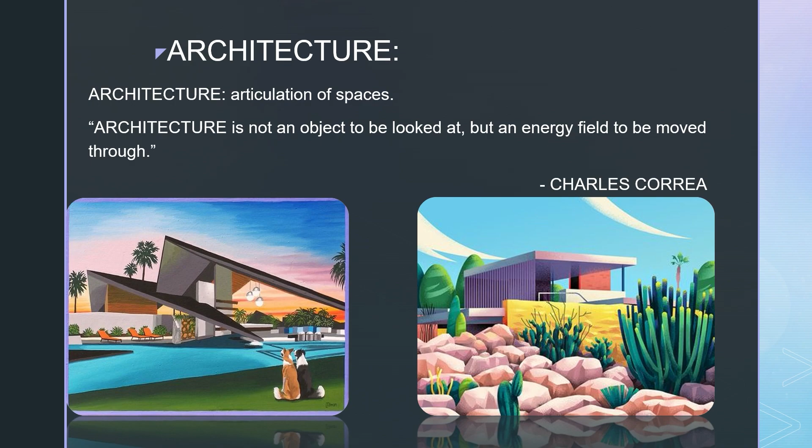From this, we understand that architecture is the built realization of a particular concept or idea. This idea can be about construction or the way people will use a building, or how the building fits into the physical or social environment or landscape.

When talking about architecture in terms of the great architect I.M. Pei, he says, life is architecture and architecture is the mirror of life. Another famous architect, Renzo Piano, says, one of the great beauties of architecture is that each time it is like life starting all over again.

And the legendary architect Zaha Hadid mentioned, I don't think that architecture is only about shelter. It should be able to excite you, to calm you, to make you think.

Architecture is a social art that touches all human beings at all levels of their existence, everywhere and every day. It impacts society in many different ways, such as designing for social causes, cultural impact, promoting social interactions, impacting psychology, and mitigating the impact of global warming and natural disasters.

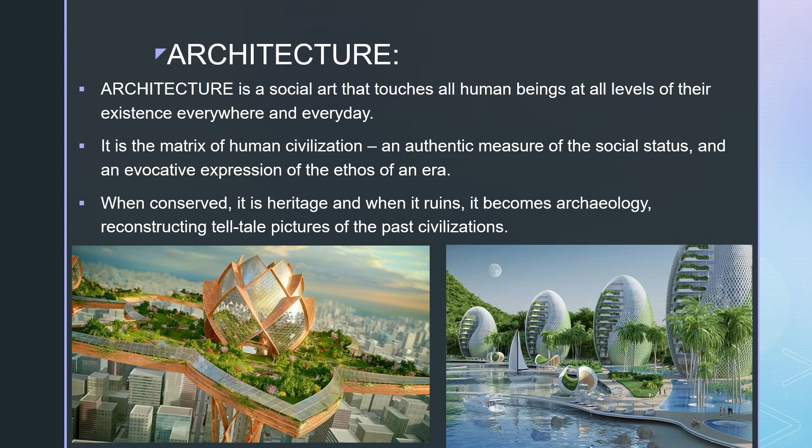Architecture is a matrix of human civilization, an authentic measure of the social status, and an evocative expression of the ethos of an era. Also, architecture that has been recognized as great has been harmonious with nature and its immediate environment. When conserved, it is heritage, and when it ruins, it becomes archaeology, reconstructing telltale pictures of past civilizations.

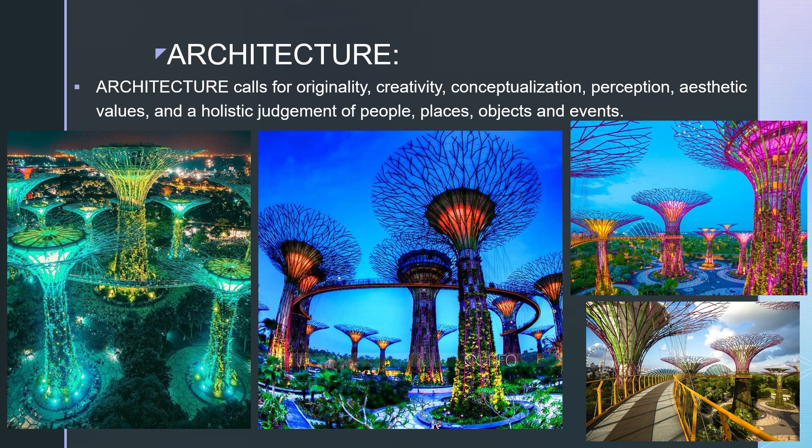Architecture calls for originality, creativity, conceptualization, perception, aesthetic values, and a holistic judgment of people, places, objects and events. Creativity is the essence of architecture, and harmony an essential aim of architects.

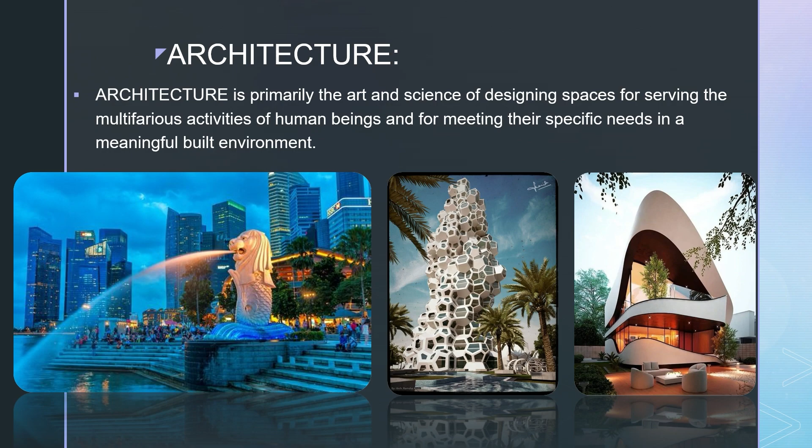Architecture is primarily the art and science of designing spaces for serving the multifarious activities of human beings and for meeting their specific needs in a meaningful built environment. When various engineering services are rationally combined with architecture's basic elements of space, structure and form, the performance of human functions and the operation of mechanical utilities become efficient, pleasant and fulfilling.

Now coming to the design process, architecture is the design activity, from the macro level, like urban designing and landscape architecture, to the micro level, like construction details and furniture. The architect contributes to the process of creation through interpretation of the problem, inspiration in the design solution, and originality stemming from personal style, which defines the work as individual and unique.

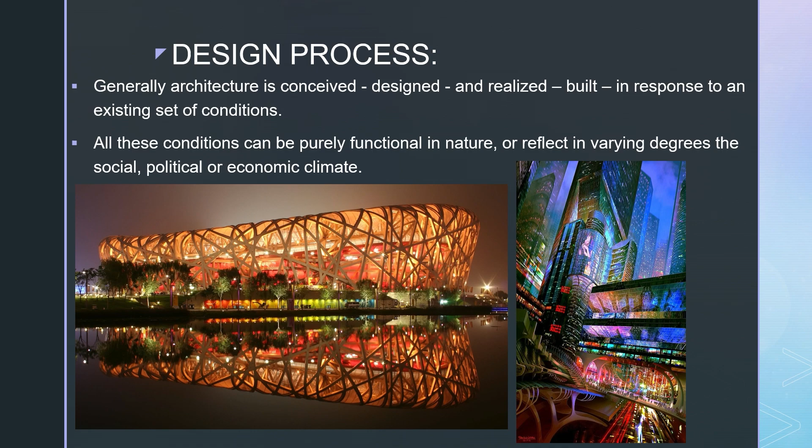Generally, architecture is conceived, designed, realized and built in response to an existing set of conditions. These conditions can be purely functional in nature, or reflect in varying degrees the social, political or economic climate. The existing set of conditions, that is a problem, is less than satisfactory, and a new set of conditions, a solution, is desirable. The art of creating architecture is a problem-solving or design process.

The architecture design process must depict architecture as the highest quality of design, providing firmness, commodity and delight. Firmness refers to structural integrity and durability. Commodity refers to spatial functionality, or in other words, serving its purpose and fulfilling the function for which the building was constructed. Delight means that the building is not only aesthetically and visually pleasing but also lifts the spirits and stimulates the senses. So we see that both aesthetic and practical factors should be taken into account.

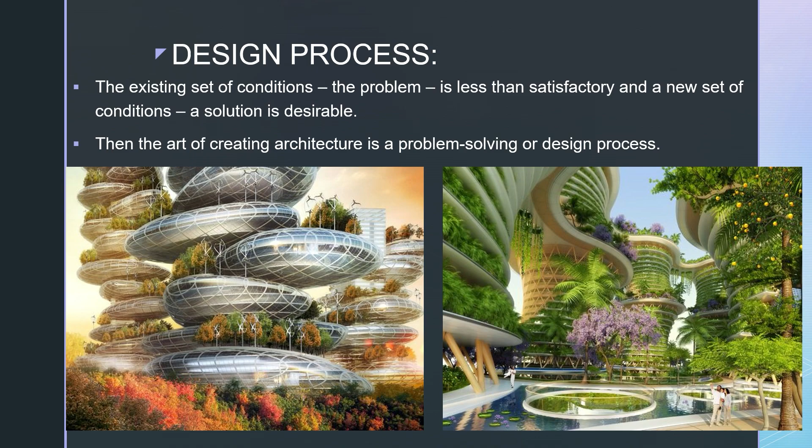Today's architectural design problems have become complex and are changing dramatically. Many factors are influencing such changes, for example, population growth, increased demand, changes in social needs, economic consciousness, energy conservation, and environmental concerns.

At first, the designers must document the existing conditions of a problem, define its context, and collect relevant data to be assimilated and analyzed. The site is described in terms of its surroundings, considering its location relative to significant features such as freeways, developments, local roads, lakes, and streams.

Next, we identify critical areas and other environmental aspects, for example, stands of trees and existing vegetation on and adjacent to your site. These areas are documented on the site plan along with property boundaries, roadways, easements, and yard setbacks. Critical areas, buffers, and setbacks are depicted on the site plan along with all other zoning requirements.

Context in architecture is the external factor that determines the architectural form and style, affects the choice of materials, and enables the building to relate with tangible or abstract situations. How a problem is perceived, defined, and articulated is related to the nature of the solution.

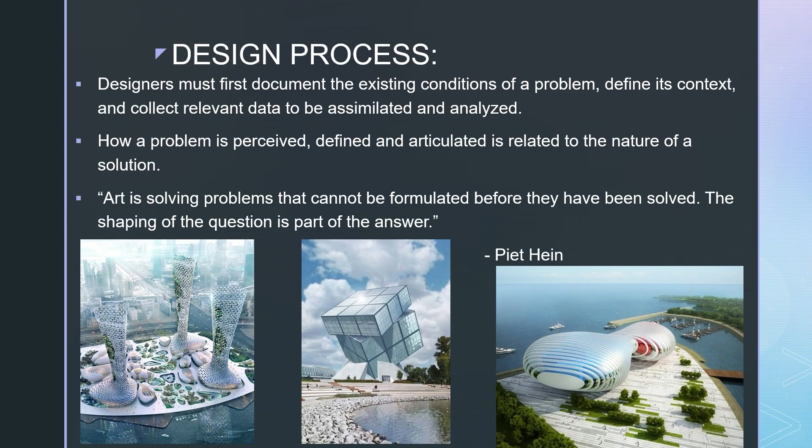Architecture satisfies more than the purely functional requirements of a building program. Human activity is accommodated in the physical manifestations of architecture. How architecture promotes endeavors, elicits responses, and communicates meaning is determined by the arrangement of forms and spaces.

Form can be described as a reference to both the internal structure and external outline, often in the shape of a three-dimensional mass or volume. Some of the characteristics of form include shape, size, color, texture, position, and orientation.

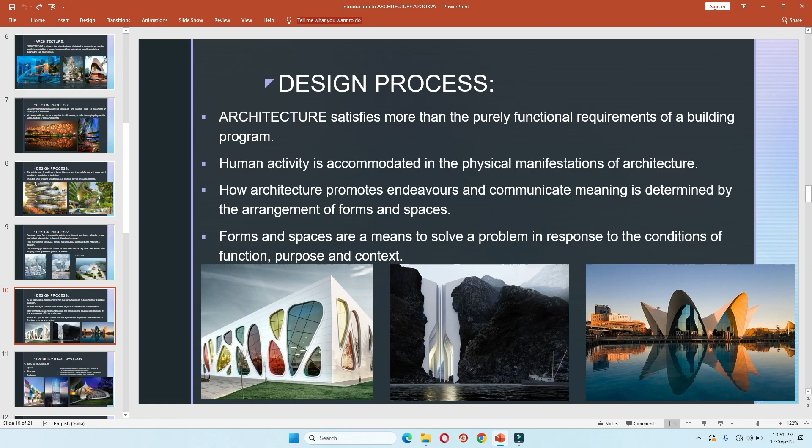Forms and spaces are a means to solve a problem in response to the conditions of function, purpose, and context.

Architectural systems refers to the architecture of space, structure, and enclosure, which is experienced through movement in space-time and achieved by means of technology accommodating a program compatible with its context. These systems should be interrelated to form an integrated whole having a unifying or coherent structure.

Now coming to the first system of space, structure, and enclosure, it constitutes the organizational pattern which brings together different forms and shapes and provides a cohesive structure to the design.

Relationships refers to the ways in which different spaces within a building are related to each other, both physically and aesthetically, and how they are connected and interact with each other. These relationships are between the interior and exterior spaces, the connection between public and private spaces, and the relationships between different rooms within a building.

Hierarchy is the articulation of spaces and forms in order of importance. It is achieved by differentiating size, shape, color, and placement of forms and spaces relative to each other. Hierarchy is used to emphasize a particular item and to influence the order in which a range of items are experienced.

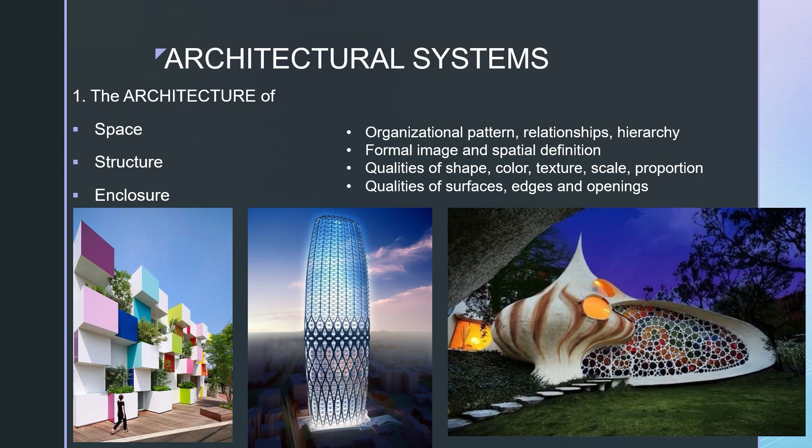Edges are the boundary lines, which are linear elements. Openings have protective and regulatory functions such as access, and allow for the exchange of heat energy, light, and air.

Coming to the second system of experience, architecture is experienced through movement in space-time. All experience of space is a time-structured process, and all experience of time is a space-structured process. Time is the fourth dimension of space. The line of movement is an abstraction of human action and perception through different spaces, and needs to be accommodated in the form of the building.

The movement in space-time can be experienced in different ways. Approach and entry strongly influence our experience of an architectural space by how we arrive in it. Approach is the path you take to reach the building, during which we prepare to see, experience, and use the spaces within a building.

Entrance is from outside to inside, or from one interior space to another. It marks a transition from one space to another. We can experience movement while entering a building, as it involves the act of penetrating a vertical plane that distinguishes one space from another. Path configuration means the linking sequences of space that users are taken through, from a chosen starting point to a specific destination point.

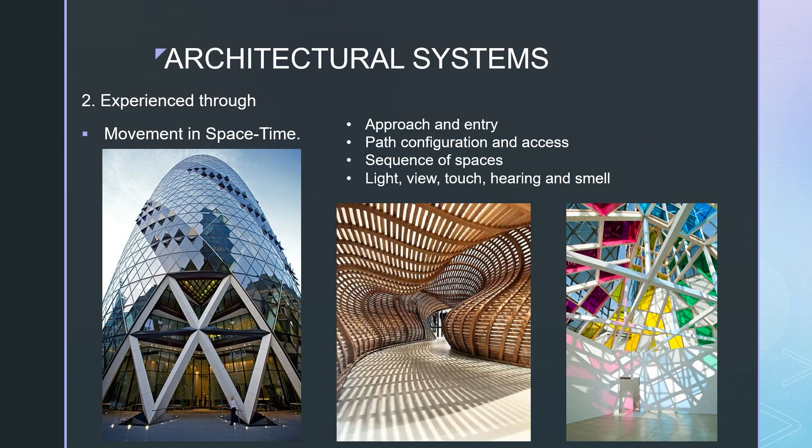Light, view, touch, hearing, and smell are related to architecture for the senses. Sensory cues induce emotive characteristics in a space and can strongly affect the user's experience. The rhythm of architecture can be felt by occupants as a result of the architect's composition or arrangement of all the sensorial qualities of space.

Now, the third architecture system is achieved by means of technology. At the intersection of design, engineering, and science, architecture technology seeks to automate and augment the design process to quicken construction, support management, and ensure high performance of materials, systems, and structures. At present, innovations like Building Information Modeling (BIM), computational design, robotic fabrication, building performance analysis, and artificial intelligence dominate the discipline. Structure refers to a number of material elements working together, providing strength, stiffness, and stability in order for loads to be held aloft.

All building structures share the same function, that is, to transmit the loads applied on a building safely to the ground, conserving its stability and stiffness. Structures are the elements that allow buildings to withstand the action of loads such as gravity, wind, earthquakes, impacts, and other environmental sources.

Enclosure is the term given to any part of a building that physically separates the external from the interior environment. It is the building envelope, that is, the building's skin. Building performance depends on the interrelationships between the building enclosure and the external environment.

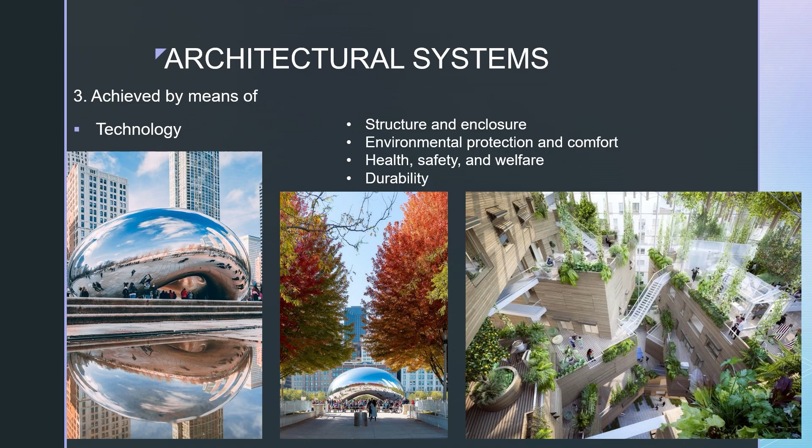Durability is the ability of a building to maintain over its lifetime the performance for which it was designed. It is a vital part of sustainable construction, as insufficient durability can result in additional unexpected costs due to repair or reconstruction, as well as environmental and social impacts.

Moving to the next architectural system of accommodating a program: an architecture program is what happens within a building or site. It is a detailed breakdown of the spaces within the project based on client requirements, user activities and needs, and spaces required for the building to operate.

Focusing on user requirements helps in creating a highly usable, easily accessible, and comfortable space for users, and also helps in evolving innovative user-friendly design techniques. Users should be involved since the beginning of the design process and throughout, and must be engaged with the design teams through a variety of research and surveys.

Architecture and planning is also about supporting people to fulfill their dreams and meet their needs and aspirations. Aspirational architecture explores the aims and failures of architecture to form ideal communities and futures. It addresses how built space speaks to human need and desire for a better life, individually and collectively.

Socio-cultural factors have a great influence on the formation of architectural spaces and play an important role in social sustainability. The cultural concept of architecture prioritizes its material meaning, and studying culture and its impact on architectural spaces is important in order to understand human behavioral patterns.

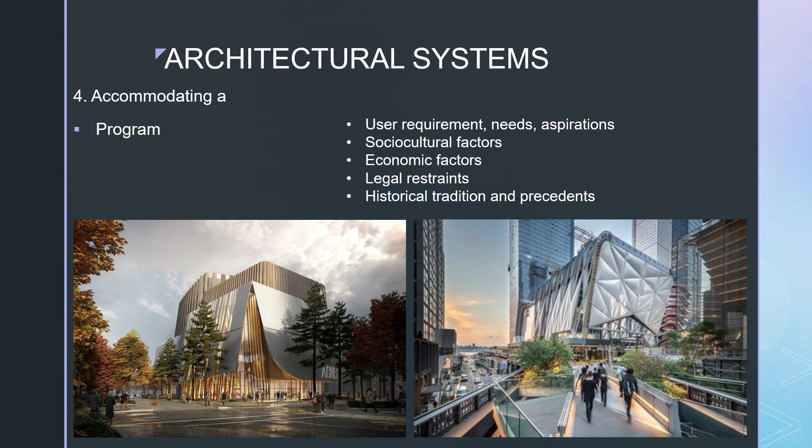The last architectural system is being compatible with its context. Architecture is the context inside which life synthesizes. Contextual architecture is a principle of design in which a structure is designed in response to its specific urban and natural environment. It refers to how a building's components are understood in relation to its surroundings.

Context in architecture consists of the external factors that determine the architectural form and style, affect the choice of materials, and enable the building to relate to tangible or abstract situations.

There are various factors influencing context in architecture. The first is site and environment, which includes the topography of the area, the site's history and previous uses, local culture, architectural style, local materials and construction techniques, political conditions, national and local policy, and the state of the economy.

In terms of the built environment, context refers to the conditions which surround a particular site or project and to which it should relate and connect in some way. The buildings and structures that make up the built environment do not exist in isolation, but are conceived and designed in order to respond to, support, and enhance their surroundings.

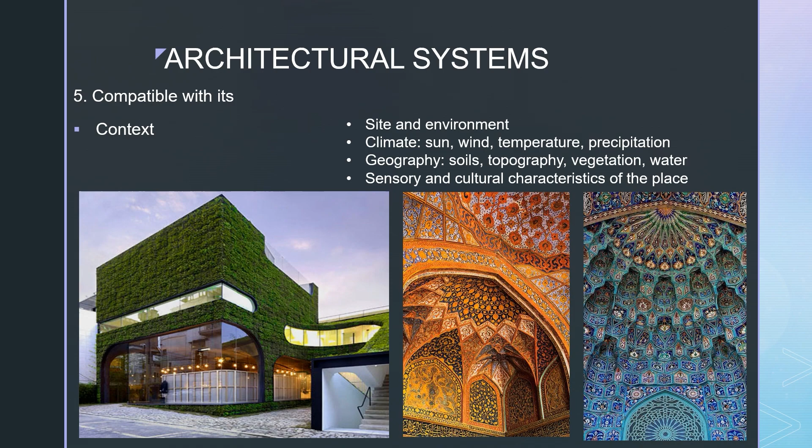As we all know, architecture is manifestation and expression of culture. Shapes, forms, styles, and spaces are influenced by the cultural values of society. Any design, when conceptualized to perform a desired function, is directly or indirectly derived from or synchronized with the cultural identity of the user.

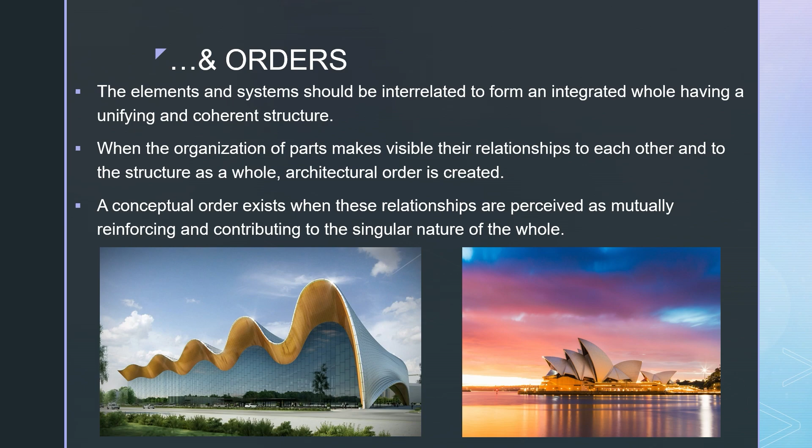In architecture, order refers to a system of rules that structure the shape, structure, layout, and proportions of a design. The elements and systems should be interrelated to form an integrated whole having a unifying and coherent structure. When the organization of parts makes visible their relationships to each other and to the structure as a whole, architecture order is created. A conceptual order exists when these relationships are perceived as mutually reinforcing and contributing to the singular nature of the whole. The physical order of architecture is constituted by form and space.

In architecture theory, form typically refers to the physical essence and shape of a work of architecture. Form of a building can impact its functionality, aesthetic appeal, and overall impact on the environment. The relationship between form and function is a key consideration in architecture, as the form of a building must support and enhance its intended use.

Space encompasses the volume of a structure, that is, the parts of a building we move through and experience. In architectural design, space is a critical element that can impact a building's function, atmosphere, and overall aesthetic. Architects use space to create a sense of flow and movement within a building, and to control the amount of light and air that enters, to separate public and private areas, and to define different functions within a building.

In architecture, the term solid and void refers to the mass and space of a building. Solid elements are the positive or volume elements, while void elements are the negative or empty spaces.

The solid-void relationship in architecture is engaged through the manipulation and arrangement of surfaces in a three-dimensional environment. Both solid and void are ways to define a volume of space.

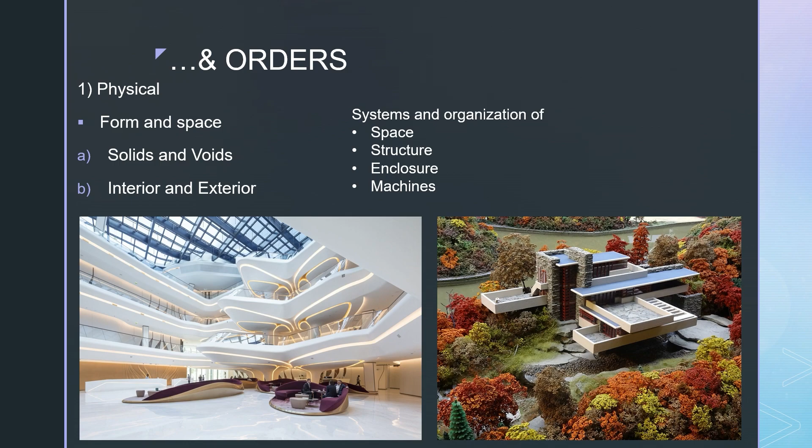Human beings had the same basic needs that could be standardized. The establishment of standard becomes necessary, not in generating standard architectural forms, but in defining the performance standard of architecture for human well-being.

Perceptual order refers to the sensory perception and recognition of physical elements by experiencing them sequentially in time. Approach in architecture is the first phase of the perceptual order and also of the circulation system throughout the building. While approaching a building, we prepare to see, experience, and use the spaces within it. From a distant view, the architectural approach somehow obscures the distinction between inside and outside but guides us to the path of use of the space within a building.

Departure in architecture is the area designated to the act of leaving. Think about an airport that has departure gates for outgoing passengers and an arrival area for people flying in. There are many types of departures, such as when you go to the store or take a flight.

Entry or entrance is the threshold between the exterior and interior. It contributes to the overall identity of the development and plays an important role in the impression and experience formed by visitors.

Entrances contribute positively to the streetscape and building facade design. Entrances provide functional and safe common areas.

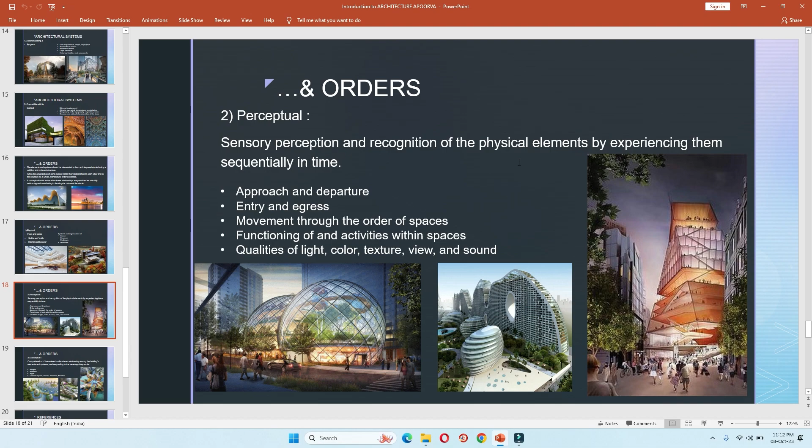Egress refers to the means of going out. Fire safety code often requires a building to have multiple points of egress, which are places for people to exit, such as doors and fire escapes. A parking lot might have some one-way access points devoted to ingress and others devoted to egress. The means of egress or exits in a building refers to the safe and accessible routes that occupants can use to exit a building during an emergency or evacuation.

Coming to movement through the order of spaces, the movement in architecture is an organized system of various types of movements stimulated by specific architectural elements. The first is the existing movement in architectural form and space that has stemmed from architectural elements in motion. Then the visual movement of a spectator, followed by the physical movement of an explorer, attracts the attention.

Next is functioning of and activities within spaces. When architects create spatial design for various types of uses and experience, they consider both the aesthetic quality of the space and how people experience interactions and sensations within these spaces.

By devising the spatial relationships and programmatic layouts that spark chance encounters, encourage communication, interaction, and consolidate communities, architects take a more active stand in providing the setting for social dialogue.

Architects consider the idea of space planning by thinking about how the space can be best optimized for its particular purpose and for those who will be using it. One key principle of space planning is creation of zones for activities within the space.

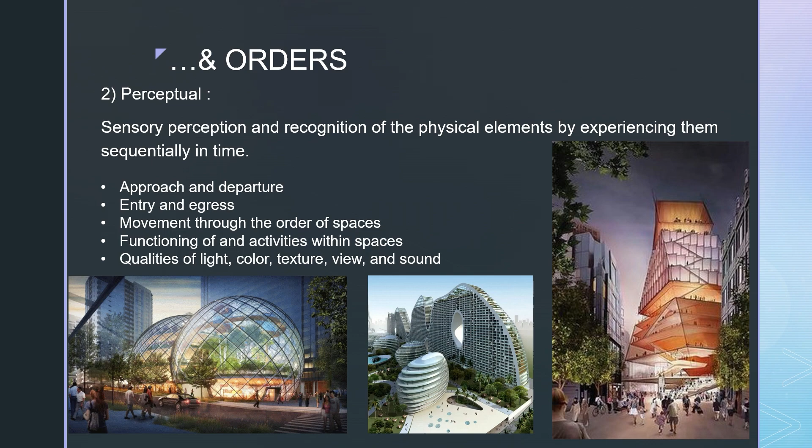The perception of space is directly connected to the way light integrates with it. Light renders texture and materials, illuminates surfaces, and creates atmosphere. It affects the whole of our alertness, well-being, performance, our visual understanding, aesthetic appreciation, as well as our biological and emotional health. The last one is conceptual order.

Conceptual order in architecture is the comprehension of the ordered or disordered relationship among the building's elements and systems, and responding to the meaning they evoke. A concept can give a proper direction and sense to any project. It is the essence and soul of a design.

Conceptual architecture can be expressed in words, images, feelings, aspirations, and atmospheres relating to that concept. An architectural concept critically engages the circumstances, brief, and situation and formulates them in an original way.

As the visual language is one of the most important elements to an architect, drawings and images will always be the best way to express your ideas as how something should be made and how those ideas align with the architect's discourse and what's the idea behind the images to critique, analyze, or propose something to inspire a new generation.

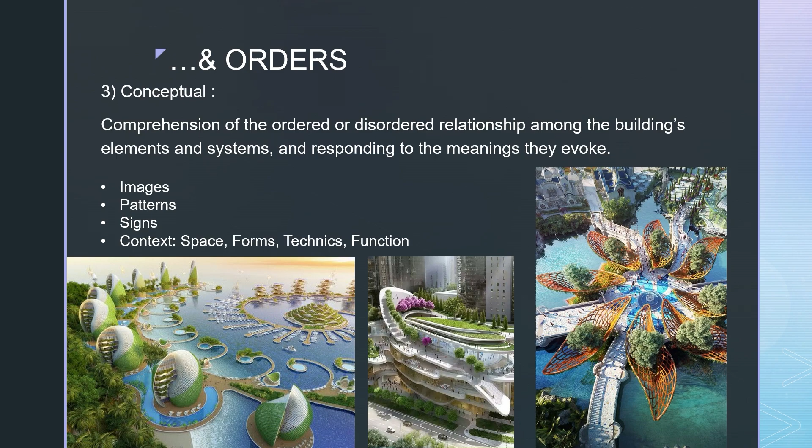Function follows form is a principle that emphasizes the importance of aesthetics and visual appeal in design. It suggests that the form of a design should be determined by the designer's artistic vision and that function should be secondary. The choice of which principle to follow will depend on the specific project and the designer's goals and priorities.

Le Corbusier quoted that architecture is the learned game, correct and magnificent, of forms assembled in the light. Frank Lloyd Wright quoted that buildings too are children of the earth and sun.